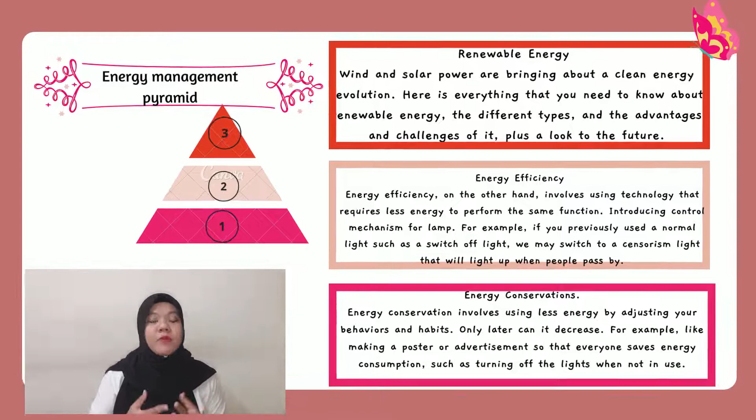Next, I will explain in detail about the energy management pyramid. First, we have energy conservation. Energy conservation involves using less energy by adjusting your behaviors and habits, only later can it decrease. For example, making a poster or advertisement so everyone saves energy consumption, such as turning off the lights when not in use. Second is energy efficiency.

Energy efficiency, on the other hand, involves using technology that requires less energy to perform the same function, introducing control mechanisms for lamps. For example, if you previously used a normal switch-off light, you may switch to a sensor light that will light up when people pass by.

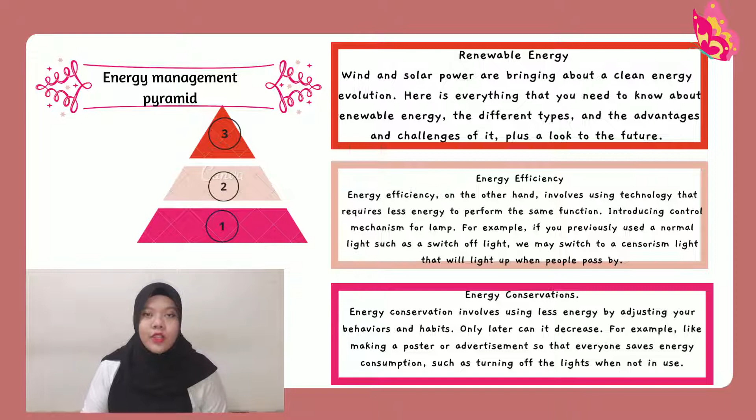Lastly, renewable energy. Wind and solar power are bringing about a clean energy revolution. Here is everything you need to know about renewable energy, the different types, and the advantages and challenges of it, plus a look to the future. That's all from me. Thank you.

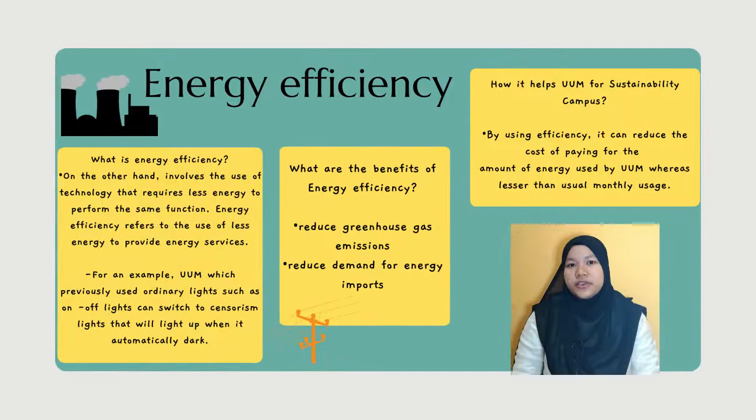The second one is energy efficiency. Energy efficiency, also known as being energy efficient, is the goal of reducing the amount of energy required to provide products and services. For example, home insulation allows buildings to use less heating and cooling energy to achieve and maintain a comfortable temperature. It involves low or medium cost investment, including converting lights to LED lights.

Energy efficiency, on the other hand, involves the use of technology that requires less energy to perform the same function. It also introduces a control mechanism for lighting. For example, if you previously used a regular light switch, we can switch to a sensor light that will light up when people pass by.

How does energy efficiency benefit the environment? Deploying such technologies can sustainably reduce greenhouse gas emissions. Energy efficiency also provides other benefits such as economic development, job creation, reduction of pollution, improvement in human health, and alleviation of poverty. For instance, it also helps UUM as a sustainability campus, reducing the amount of energy used by UUM on a monthly basis.

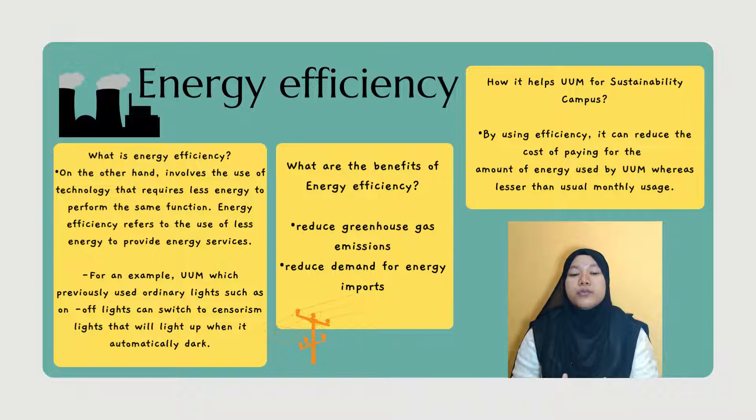The last one is renewable energy. Renewable energy, often referred to as clean energy, comes from natural sources or processes that are constantly being replenished. For example, sunlight or wind continues to shine and blow, although its availability depends on time and weather. Wind and solar energy brought about a clean energy revolution. Here's everything you need to know about renewable energy, its different types, and its advantages and challenges, as well as looking to the future.

Among the benefits of renewable energy: it generates energy that does not produce greenhouse gas emissions from fossil fuels and reduces some types of air pollution. It diversifies energy supply and reduces dependence on imported fuels, creating economic development and employment in manufacturing, installation, and more. It also helps UUM as a sustainability campus, which can use sources straight from the environment to generate power. UUM is a green and environmental area which can easily access sources of renewable energy.

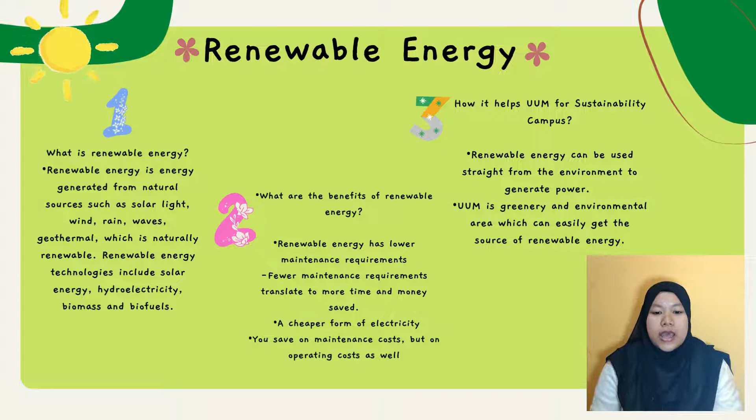So I hope my explanation can give you an understanding about these three elements of the energy management pyramid. That's all from me. Thank you.

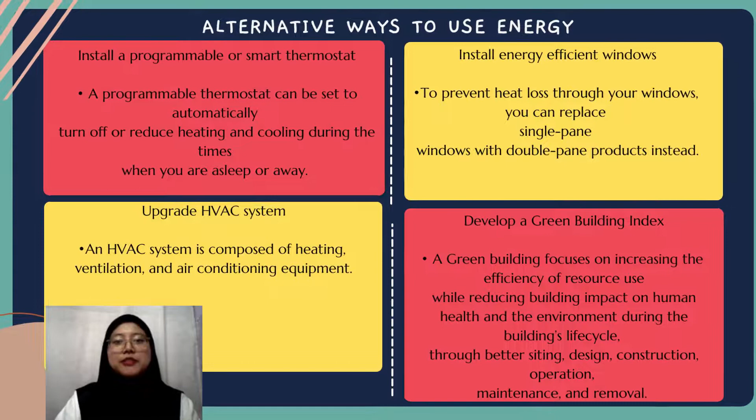Firstly, install a programmable smart thermostat. A programmable thermostat can be set to automatically turn off or reduce heating or cooling during times when you are asleep or away. When you install a programmable thermostat, you eliminate wasteful energy used from heating and cooling without upgrading your HVAC system.

Next, upgrade the HVAC system. An HVAC system is composed of heating, ventilation, and air conditioning equipment. Heating alone is responsible for more than 40% of home energy use. Because homes in northern regions are exposed to much colder temperatures during the year, Energy Star gas furnaces have different specifications in the northern and southern halves of the United States.

Next, we can install energy-efficient windows. Windows are a significant source of energy waste because they can add up to 10 to 25% of your total heating bill. It can also prevent heat loss through your windows, and you can replace single-pane windows with double-pane products instead.

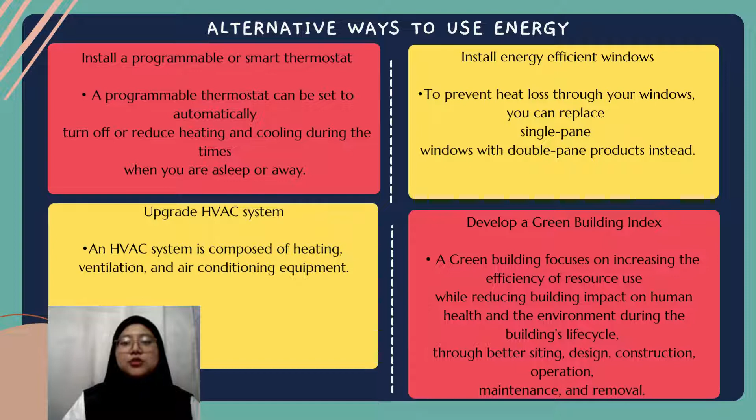Lastly, develop a green building index. A green building index focuses on increasing the efficiency of resources used like energy, water, and materials, while reducing building impact on human health and environment during the building's life cycle through better siting, design, construction, operation, maintenance, and removal. Green buildings should be designed and operated to reduce the overall impact of the built environment on its surrounding.

Next, I will be talking about the zero energy building. So what is zero energy building? It is a global program involving the development of super energy efficient buildings that are integrated with renewable energy application. It is actively promoted by the European Union, Japan, Singapore, and countries that are committed to energy and carbon reduction. Malaysia is suitable in adoption of Japan's zero energy building definition.

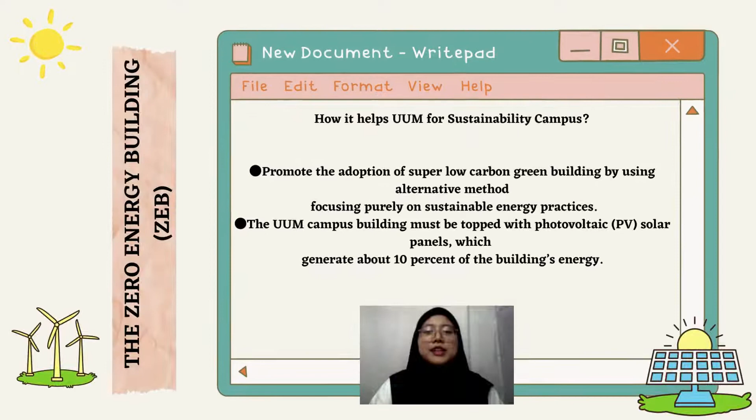Next, how can zero energy building help UUM for a sustainability campus? Zero energy building is one of the technologies that we can apply in UUM campus. It promotes the adoption of super low carbon green buildings by using alternative methods focusing purely on sustainable energy practice. The UUM campus building must be topped with photovoltaic solar panels, which generate about 10% of the building's energy. The centerpiece of the building is a large central atrium designed to admit and regulate lighting using an automatic roller blind system that is responsive to the intensity as well as the angle of the incident sunlight.

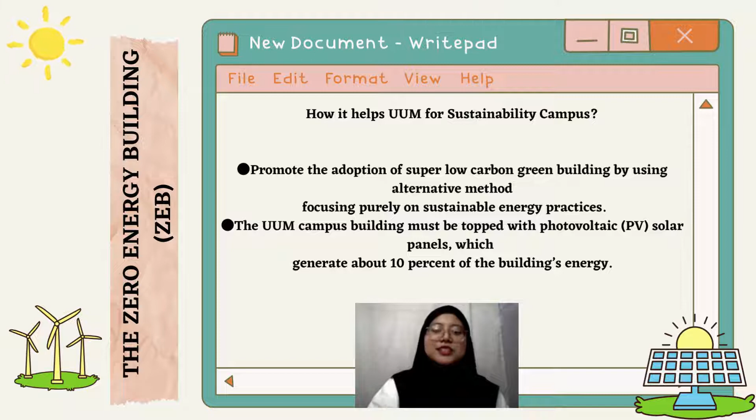5 steps to getting the most out of an energy audit: first, benchmark; second, plan; third, audit; fourth, implement; and lastly, measure.

First is benchmarking. Energy benchmarking is a method used to determine whether a building is using energy comparably to similar facilities with similar occupancy, climates, and size. Through energy benchmarking, building auditing can be pursued more effectively when determining which buildings are inefficiently using energy.

Second is plan. An energy audit can be defined as a process of verification, monitoring, and analysis of energy use, which can be part of a technical report containing recommendations and an action plan for energy optimization together with a cost benefit analysis. Third is audit. An audit is an unbiased examination and evaluation of the financial statement of an organization.

Next is implement. The implement phase involves putting the project plan into action. The project manager will coordinate and direct project resources to meet the objective of the project plan.

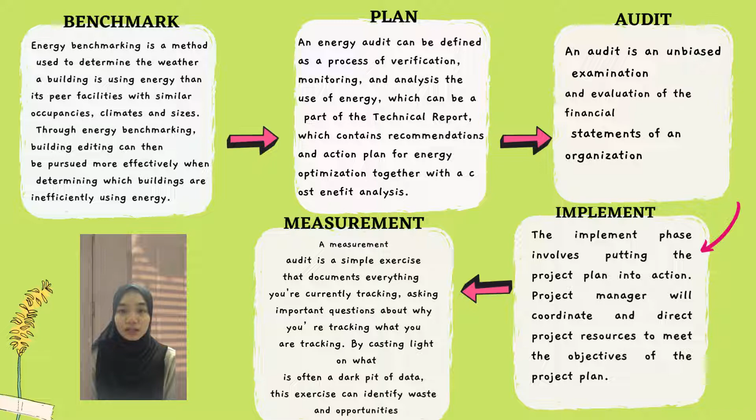Lastly is measure. A measurement audit is a simple exercise that documents everything you are currently tracking, asking important questions about why you are tracking it. By casting light on what is often a dark pit of data, this exercise can identify waste and opportunities.

Next is the Energy Management System Framework based on ISO 50001. Management commitment implies the direct participation by the highest level management in specific and critically important aspects such as safety, quality, environment, security, and programs of an organization.

Second is policy. An energy management policy for UUM should set out the organization's aims and goals concerning energy use and management in UUM. The policy should be a public statement about the business energy management goals that can appear in documents or on your website.

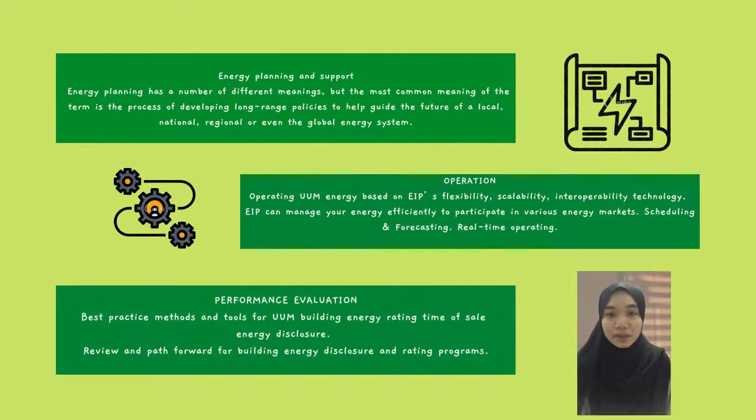That is energy planning and support. Energy planning has a number of different meanings, but the most common meaning of the term is the process of developing long-range policies to help guide the future of a local, national, or even global energy system.

Operation: operating UUM energy based on EIP's flexibility, scalability, and interoperability technology. EIP can manage your energy efficiently to participate in various energy markets, including scheduling and forecasting, and real-time operating. Lastly is performance evaluation.

Best practice methods and tools for UUM building energy rating, time-of-sale energy disclosure, review, and path forward for building energy disclosure and rating program.

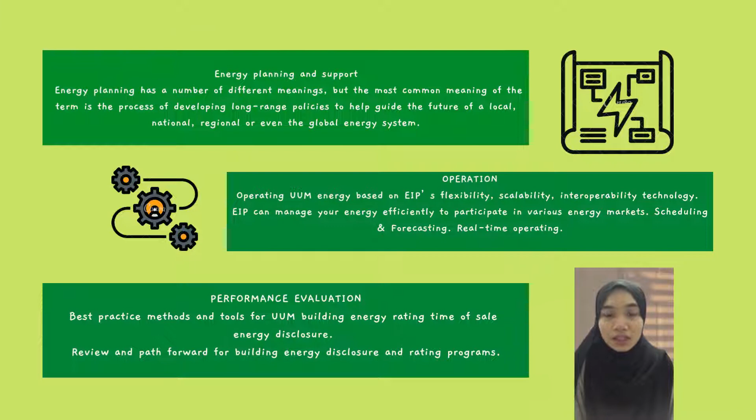Firstly, green technology is a term that describes the use of technology and science to reduce human impacts on the natural environment. It encompasses a wide area of scientific research including energy, atmospheric science, agriculture, material science, and hydrology. The aim of green technology is to reduce emissions of carbon dioxide and other greenhouse gases to prevent climate change, such as global warming. So in short, solar power is one of the most successful green technologies, and now it's cheaper to deploy than fossil fuels in many countries.

Next is about low carbon energy. What is low carbon energy? It is actually generated using lower amounts of carbon emissions, such as wind, solar, hydro, or nuclear power. These alternative methods of producing energy are far better for the planet as they release less carbon into the atmosphere.

Next, what does low carbon mean? Which is less carbon dioxide. First of all, we must understand what carbon dioxide is. Carbon dioxide is a key greenhouse gas that drives global climate change. It is released through many different types of activities such as deforestation, burning fossil fuels, and volcanic eruptions.

The types of low carbon energy are wind, solar, hydro, or nuclear power. The first three are renewable, which means they are good for the environment as natural sources are used, such as wind or sun, to produce electricity.

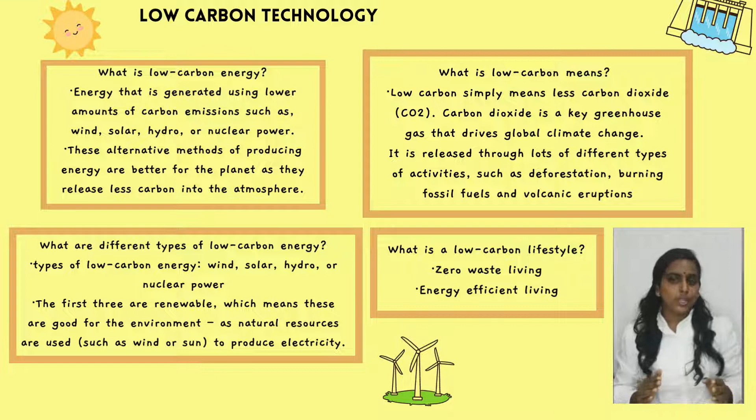Apart from this, what is a low carbon lifestyle? It means zero waste living and energy efficient living. Thank you.